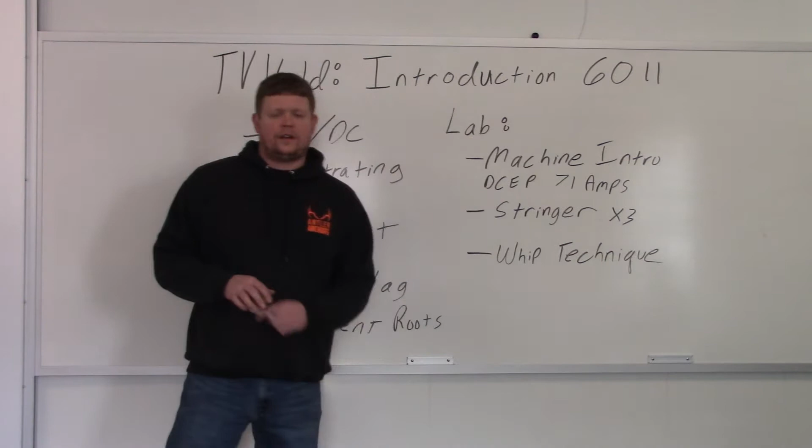Today we're going to go over an introduction to 6011. It's an electrode used in shielded metal arc welding, or stick welding, a very common electrode that is used for general all-purpose welding. We're going to go over some general information here on 6011. Then we're going to go out in the lab and actually run some so you can see it, and we're going to zoom in on it so you can see it up close, the different manipulations that you can do, and also some stringers that we're going to do out there.

So we're going to start right here with AC/DC. I got it written there. 6011 is compared to 6010 a lot. The difference between 6010 and 6011 is 6011 can run on AC or DC. What we're going to do out there is DC electrode positive, so direct current electrode positive. But if you had a buzz box in your garage and you only had AC capabilities, you'd want to get 6011 over 6010.

All right, so that's one of the main differences. I think there's potassium in one and sodium in the other. I can't remember which one's which, but that's the difference that makes it able to weld on AC and DC versus just on DC, which is what 6010 can run on. It's a penetrating rod, so it burns into just about anything. You got it right down here, burns hot. That's why it's used a lot on farms and things like that, because 6011 will burn through just about anything. Rust, paint, grease. It's a really good rod to burn through dirty material, so that's what it's used for a lot, I would say.

It has a thin slag. It doesn't have a real thick slag. It's got a thin slag, kind of like 6010. It's kind of like the opposite of 7018. That's a nice thick slag. 6011 is more of a thinner slag. It's used for root passes because it produces excellent roots. So you would do a 6011 root and then cover it with something like 7018.

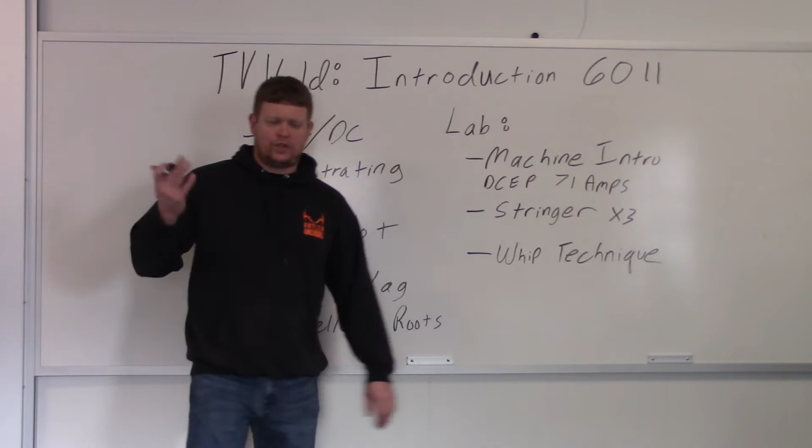So what we're going to do in the lab here is a machine intro. I'll shoot the machine and do the intro, which I already got written right here. We're going to be on direct current electrode positive, and I ran it at about 71 amps. I already did it, so I know exactly how it turned out. We're going to do a machine intro, then a stringer, and then a whip technique. So stringers basically are no manipulation, right?

I've always thought of 6011 as you either run it with a stringer or you do a whip technique. Now a whip technique I kind of think of as a stringer as well, because there's no side-to-side manipulation. You get in the puddle and then get out and then go back in. Out, back in, and it's a straight manipulation, so there's no side-to-side. So I kind of consider it a stringer as well.

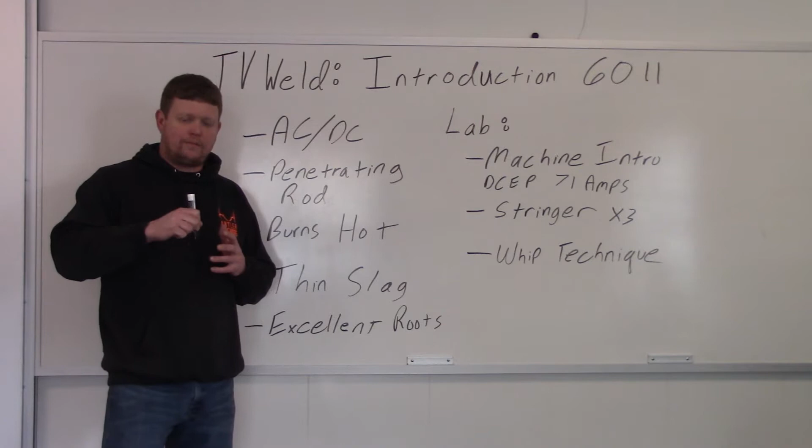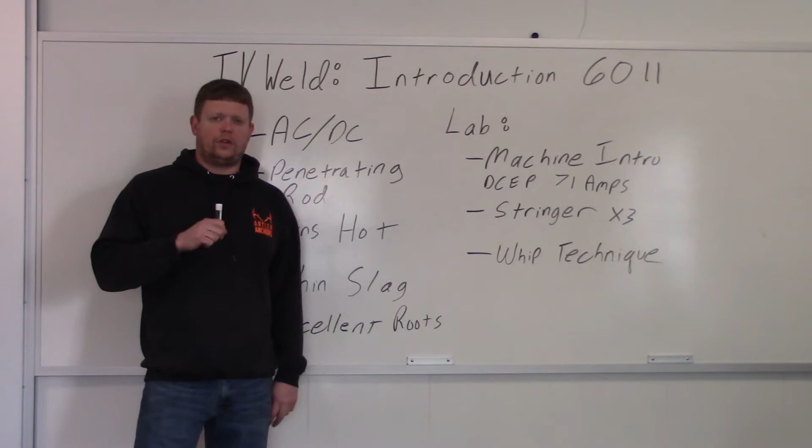I'm kind of curious to see if people think that a whip technique is still considered a stringer, because you are manipulating it, but you're going straight back and forth, not side to side. So I kind of consider the whip technique to be a stringer as well. You might disagree. But the whip is usually used if you're getting a hole in a root. You get out, allow it to solidify, add more metal, and you draw that root across the plate or the pipe, whatever the technique might be.

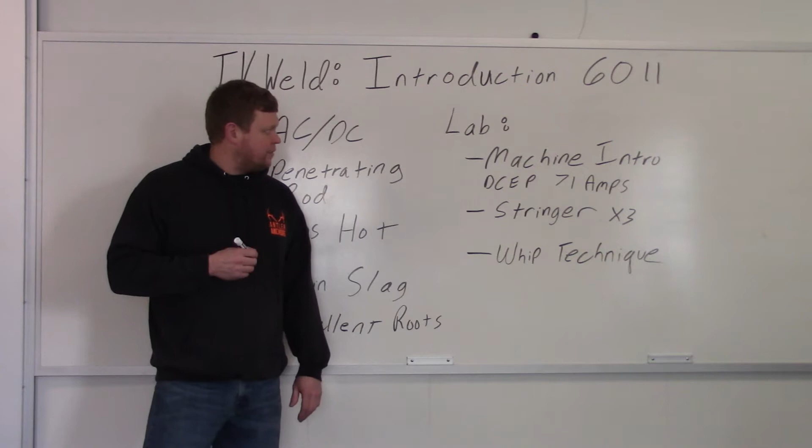I've had a lot of people that want to see some 6011, so I'm going to shoot some 6011 videos. I got some in. I'm probably going to start with just on the plate, an introduction like we're doing right now, and then I'll get into root passes for flat, horizontal, vertical, and overhead groove joints.

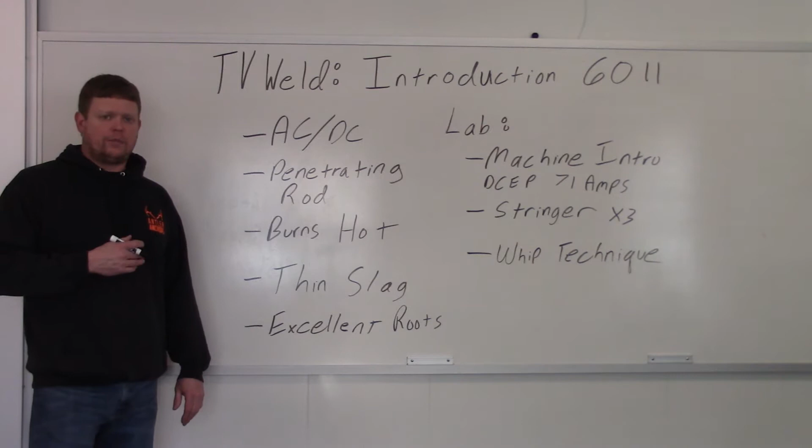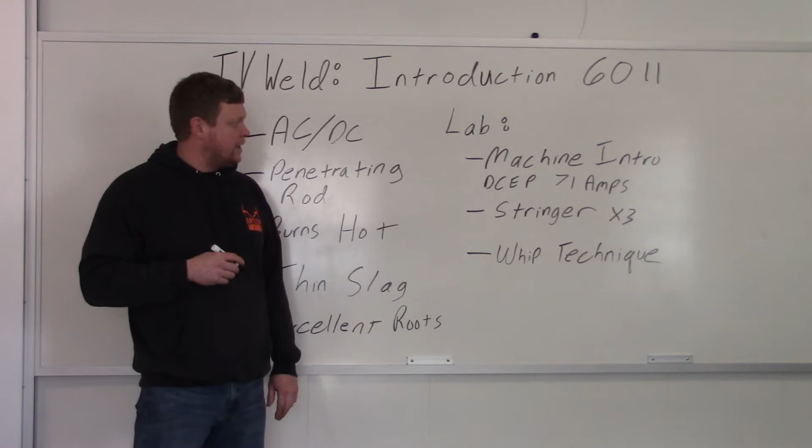But for right now, we're going to go out and do, I wrote ×3, I forgot to mention that. I'm going to do 3 stringers on a plate and then 3 whips on the back side of the plate. But I'm going to film just the single passes on one plate, if that makes sense. So we'll do a comparison at the end. There'll be 3 stringers and 3 whips, and then we'll do some videos up close of both the stringer and the whip technique. So we'll get out in the lab and start this thing.

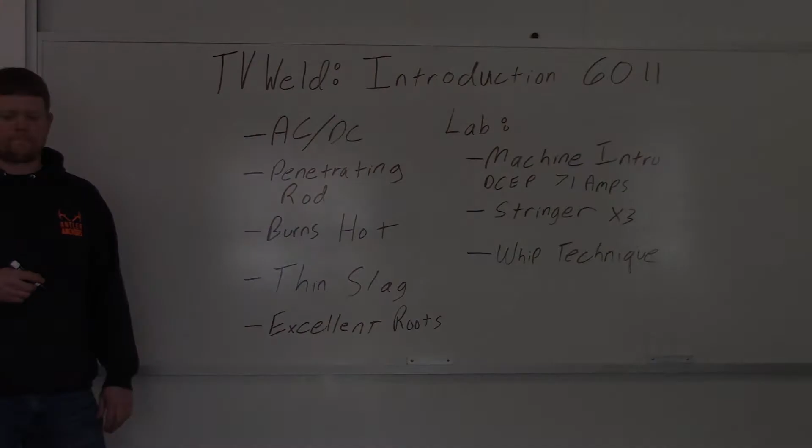We're going to start out here by getting a shot of the rod, and you can see it's 6011, 1/8 of an inch. We'll get a shot of this rod real quick, and then we'll move to the machine and check the settings there.

So here we are at the machine. You can see we're set at stick, panel. It's on, so that takes it off the remote or the foot pedal. So you have a local connection for the stick at 71 amps and at direct current electrode positive. And we're on a Miller Syncrowave 250 DX. So let's get at it.

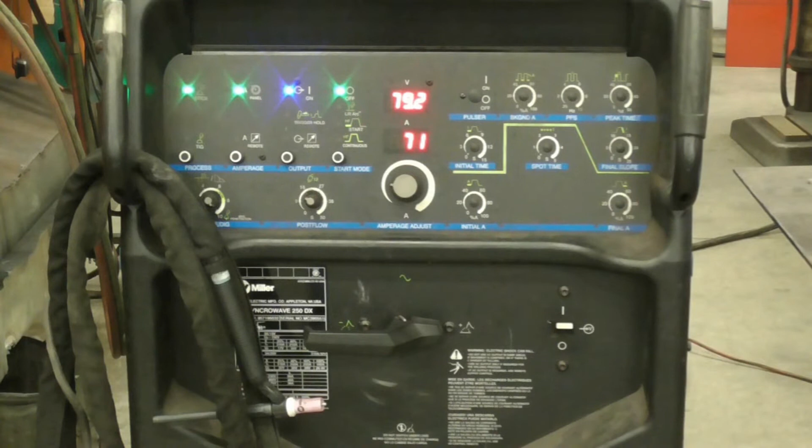So we just got the arc struck here. You can see we have a trailing angle. This shot right here on the video is actually sped up. I wanted to get more to the close-up here. As you can see, it's got a trailing angle, keeping her nice and straight. Nice natural progression as the electrode's getting eaten. Looks like we're about done here.

So here we are zoomed in. So we're starting here with a stringer, and the next one we're going to do is going to be the whip. Stringer is pretty self-explanatory. You can see trailing angle. Very little manipulation. You want to keep the arc tight, but not too tight with 6011.

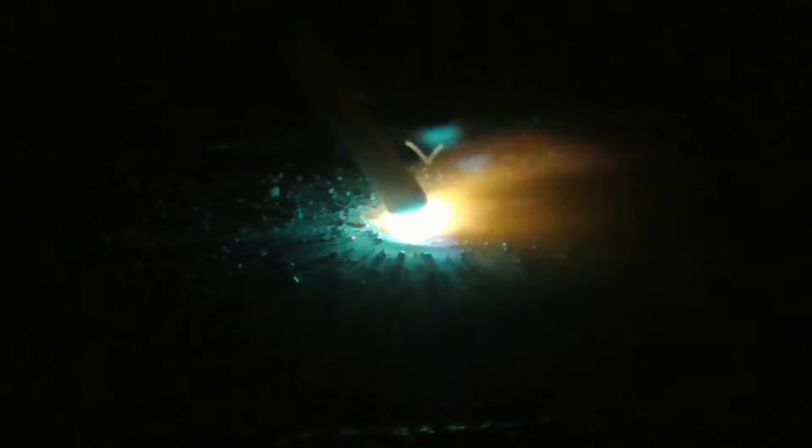I did try and do some extremes. I went really far away and pushed it really close, and when I went real close, it kind of bubbled up the slag a little bit. So if you got too close, it wasn't really desirable. You want like a 1/16 of an inch to 1/8 of an inch arc length there.

You can see just continuing down the joint. I did put a soapstone line down so I wouldn't waver all over the place. It always helps if you have a little bit of guidance when you're doing stringer beads or just beads on a plate in general, because there's no joint guiding you.

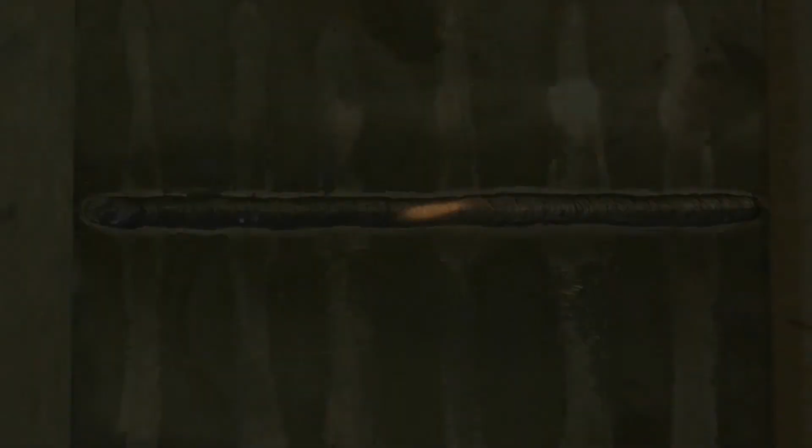You know, if you're in a groove, the groove guides you, and if you're in like a T-joint or a fillet weld, the plates kind of guide you. When you're just on a plate, you can wander pretty easily. So I put a soapstone mark down. You want to keep that arc length nice and consistent. So here's a look at the stringer we just did at 71 amps with a 6011 1/8" rod.

We're going to move into the next technique. We'll film that. It's a whip technique, commonly used on 6010, 6011 rods. So let's get at it. Alright, so we just struck the arc, and you can see the whip is just basically a back and forth motion. Now this video here is sped up, so it's moving a lot faster than you would in real time, but I do have it zoomed in here in a minute, and that's running real time so you can get a better idea of the quickness of the whips.

There we go. Alright, that's real time, and you can see it's just a back and forth motion. I like to try and pull it forward and view the puddle solidifying behind it and then bringing it back to add that metal. This is a very common technique, especially if you get a big hole on a root. You get out, you let it solidify, and then you get back in. You get out, let it solidify, and you get back in.

We got a pretty good video here of the one bead, and then I had another one where it just got the end, which you're going to see here in a minute, and that one came out really, really good. So we'll finish up this stringer right here, and then go into the other weld that I just got the end. I would still consider this a stringer because it's not going side to side, it's just straight up and down, back and forth.

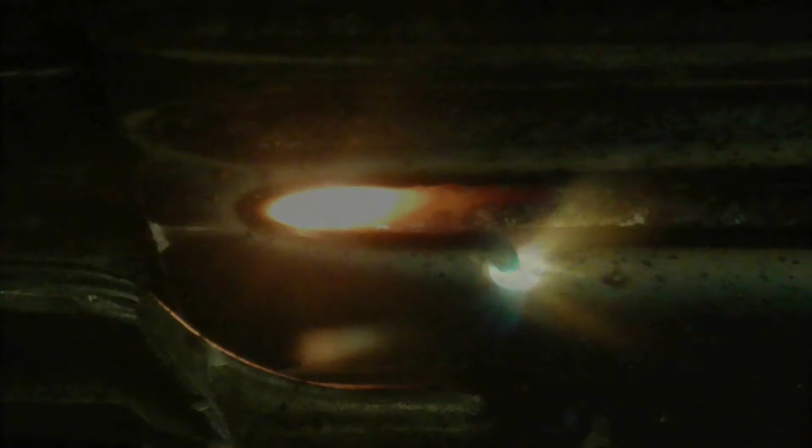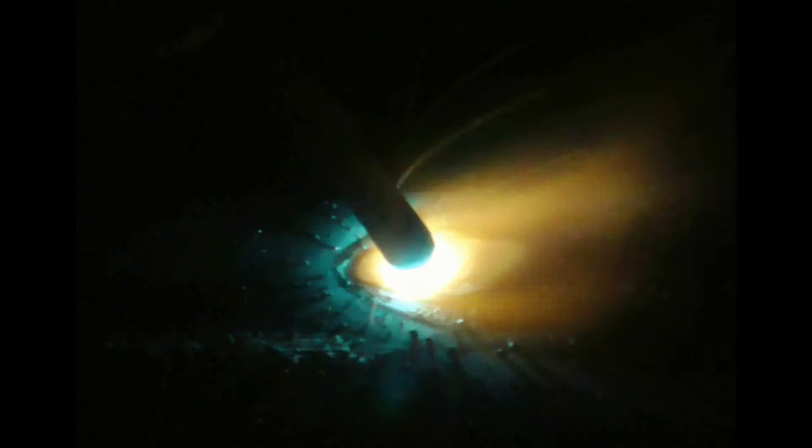Here's the end of the other bead that we filmed. It came out pretty good, so I threw that in there too. And you can see, get in, and get out. And it's rolling that puddle back into it. You can see it real well with this video here. We're almost out. Moving on. Here's a look at the whip technique we just did.

So we did a stringer, we did a whip. We'll take a look at the two right next to each other because they're on the same plate. And then I did 3 stringers and 3 whips on the other side, and we'll take a look at all those. Okay, there's the top one. That was the stringer we did. The bottom's the whip we did. And you can see the stringers, the puddles are much closer together. The whip defines the puddles a little bit more.

So what we'll do now is we'll look at the 6 we did on the other side. 3 stringers with no manipulation, and then 3 whips. So the top 3 beads are stringers with no manipulation. The bottom 3 are with the whip technique. All on 6011, 71 amps, 1/8". So hopefully that gives you a good idea on the basics of 6011.